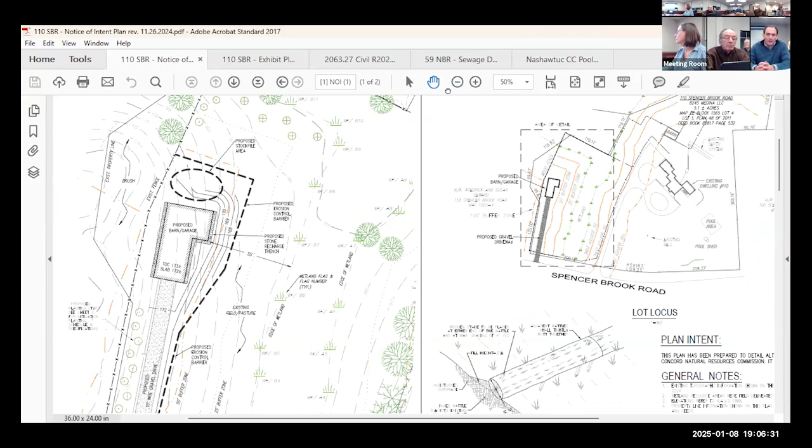The result of the project is an improvement to the vegetative buffer on the site. We're providing both screening vegetation and some naturalization of the existing field area. Sheet 2 has a listing of all those planting types and sizes. I see it coming up here.

Some of the neighbors have expressed concern about screening, so plantings have been specifically put along that area to provide screening for the neighbors' benefit as well as the applicants'.

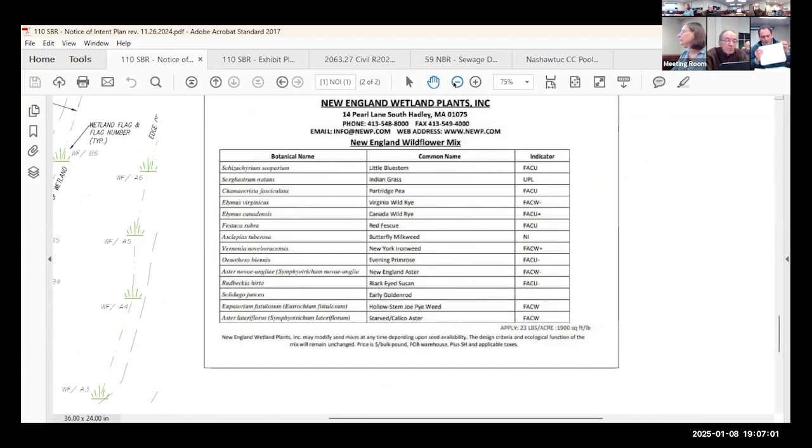The commission had also asked us to look into the feasibility of positioning the structure at the terminus of the existing driveway, so we prepared an exhibit plan that went through that. That's exactly that document there.

What we found was problematic is providing that access—they have to get into that area. We could position the building there, but it would result in a slightly reduced setback to the wetlands. We're proposing a 55-foot offset to the wetland with the preferred location; this alternative results in a 52-foot setback.

The relocation of the fencing, required to allow the animals to get around to the barn where they spend their evenings, would require removing the existing vegetative buffer and creating a bigger footprint of alterations. This proposed layout resulted in about 6,100 square feet of alterations, whereas our proposed layout on the notice of intent plan was limited to 5,700 square feet.

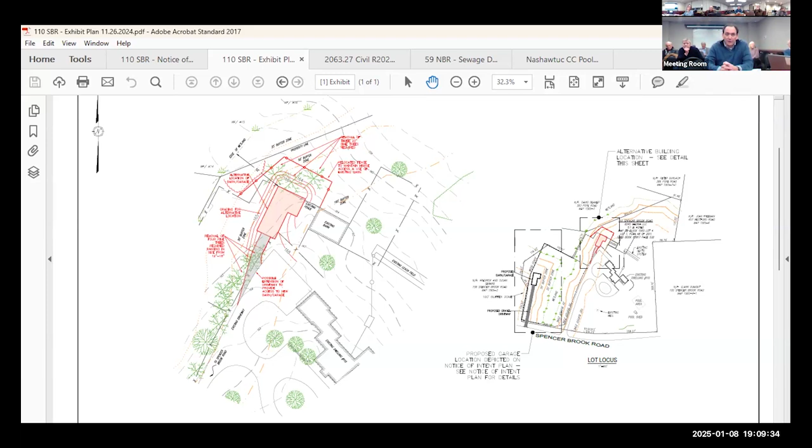Our proposed preferred location on the notice of intent plan does not require any tree removal, whereas this alternative would estimate about 4 trees removed. For those reasons, as well as the applicant's desire to keep using the existing barn in a reasonable manner, they much prefer what we presented on the notice of intent plan, and we'd ask the commission to consider that with the mitigation provided.

That is a summary of the changes in the documents that we brought forward to you, so I'd be happy to answer any questions that you have.

As you alluded to, there was a letter from the abutters that laid out many things. I saw that; we're taking that into consideration. One specific common concern is whether the mitigation will just be eaten by the horses and survive. I'm not sure if the plan you have here takes that into account with some larger shrubs in a different area, or if you're still proposing that a lot of the mitigation is the wildflower seed mix.

There's a substantial amount that is also trees—American hornbeam and some white pines mixed in as well, mostly along the perimeter areas.

I did receive correspondence from your office, and they were kind enough to let me know, and I spoke with the applicant. They are 100% willing to do mitigation on other areas of the property as well, removed from the pasture. The intent of this was to do it in proximity of the area being worked upon, but they'd have no objections. While outside the scope of the notice of intent, they intend to do landscaping throughout and would like to work with the commission on that going forward.

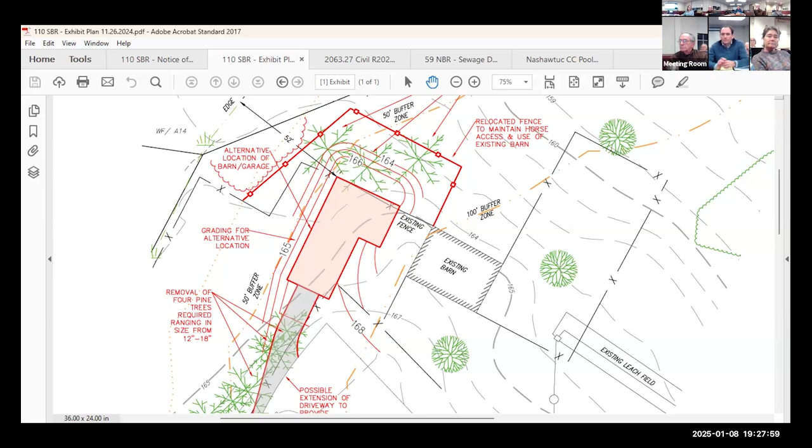Looking at the letter again, I understand that they'll be loading horses into the trailer, and if they're moving horses in a confined space, it has to be large enough for them to be comfortable doing it. So I'm not arguing that the barn should be smaller, but if it could be rearranged a little bit, it would improve things.

I had two questions sparked by looking at the letter again: is there going to be any electrical, water, or other utilities to the garage? The house is on a well—we actually spoke about that at the last meeting. We're not proposing to have any water in the location.

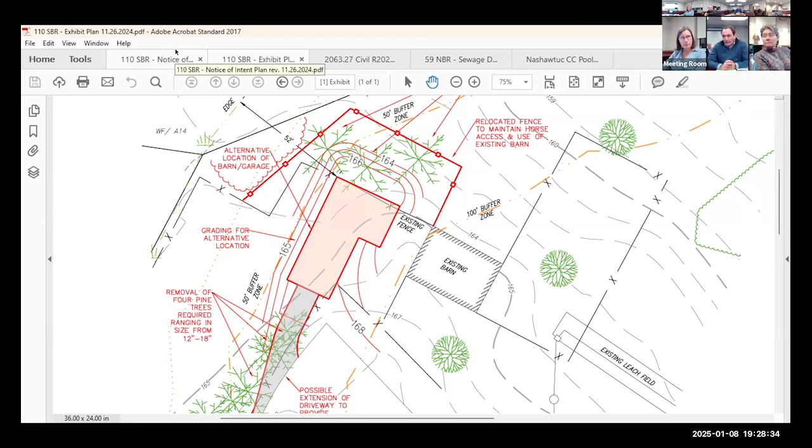There's a call out for the electric line on the far side away from the wetlands, along the gravel driveway in this location. We didn't detail the utilities on the exhibit plan—it's just for discussion purposes of this meeting, not really for a permanent basis. We do show the electric line, but not necessarily on the same service as the house—they would probably run a separate service off that.

So there'd be some way for the poles or trench or some way for electricity. The utility line is actually on this side of Spencer Brook Road, and this utility pole is just off there. The Concord Municipal Light would dictate how they would want that landed and connected.

It's up to you whether it's above ground or underground, but it needs to be shown on the plan too. Wherever you land, I was wondering if there's any impact on the buffer or anything. So we call it out right down there. The connection would be in the right of way.

Oh, I see. And it would go how, by trench or above ground to the barn? I'm assuming a trench, and that's the intent on the plan. Okay, and that doesn't go through the buffer area at all? No, it's in the entirety of the pasture, it's essentially in the buffer.

There's also a question about the depth of gravel for the horse trailer weight. Has that already been factored in? Yeah, a standard gravel driveway, 12 inches. So nothing different to what we've already seen on the plan? No, correct, and the driveway itself is essentially mirroring the existing grade there. You can see there's very minimal grading for that.

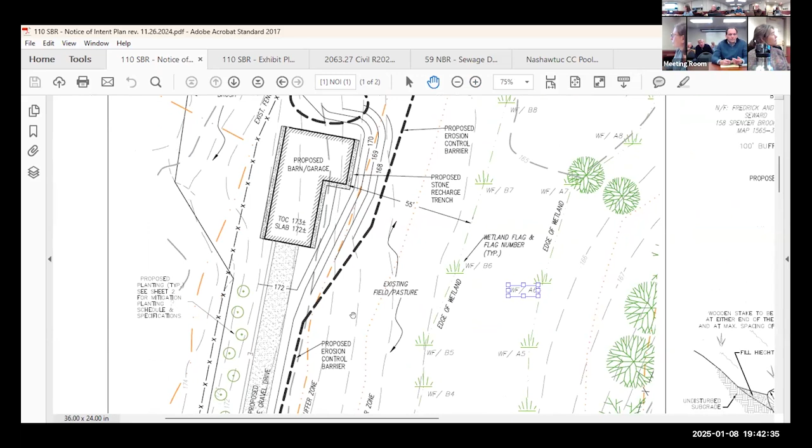Yeah, see, there's a 50-foot line from the corner, that L shape showing 50 feet. If you eyeball that, the erosion control barrier is 10 to 15 feet, exactly 12.5 feet if the measurements are right. But it's safely into the 25 to 50 foot zone.

So there's the 25-foot line, it's a dotted line, very faint, and it would be helpful if you made that more clear. But to be clear, there is work with the erosion control that goes beyond the 50-foot. The commission's policy is that structures need to be 50 feet away. We exceed that, and there's no work in the 25-foot buffer zone.

Correct. So just to be clear, the proposed erosion control barrier doesn't constitute work in the 25-foot zone, it's outside the 25, but it's within the 50, the 25 to 50 zone. And is that structure acceptable? Yes, that's okay.

I'm just going to pass this around. This is the entrance to the site. That'd be helpful about the trees, so you can keep that for the file if you want. You can see there's an existing gate there.

Which is the gate for the existing driveway or the new one? Oh no, this is in the proposed new location. Okay, but the gate is not, if I look at the plan, the gate is further over than the entrance to the new proposed driveway. That gate is not where the entrance is.

So the intent is to respect the commission's 50-foot no structure zone with the driveway, so it is shifted slightly up gradient, but we've located all the trees. Those are located by surveyors throughout the property. We've positioned everything to respect the trees and the 50-foot buffer zone in this case.

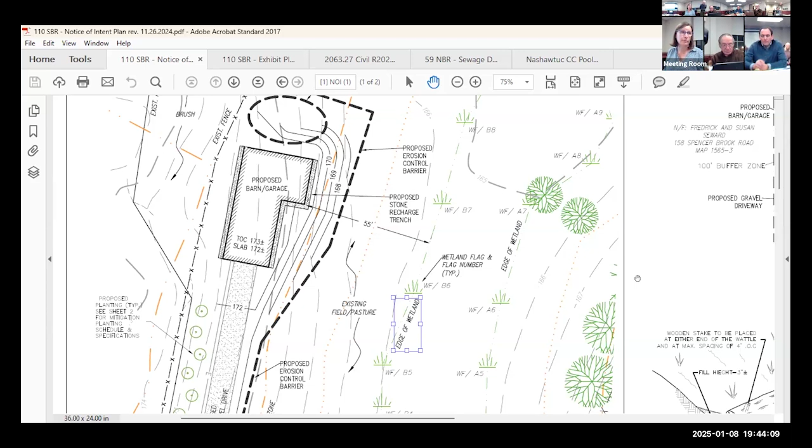Okay, well, thank you very much then. So we will be in touch about a visit, we'll do a visit, and if you can let me know so I can let the applicant know.

I think you should let the applicant know the commission will stop by to visit. There's three people on the commission, but I don't think you'll get a group attending at the same time. So let us know once the structures are staked and marked, and just let them know. I'd advise the commission to knock on the door when they go. I think it'll be hard to schedule since I'm leaving town Monday, so I need to know I can go onto the property no later than Sunday.

Well, when an applicant files, the commission has the right to go onto the property, but of course we want the applicant to be aware. I'm thinking in terms of staking and indicating where things are going to be. The sooner the better, if you can communicate to us when it would be set up so we could see it best. I'll check our schedule and let you know. The sooner that can be done, the better for me, just because I'm disappearing Monday morning.

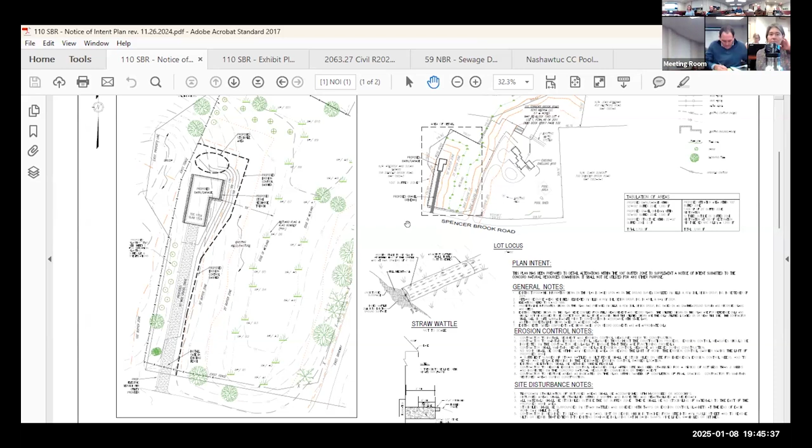Okay, thank you very much. I'll let the applicant know, and we'll continue to the 29th. Thank you, Karen, you'll let us know when they say. Okay, good. It'd be good if you had a map—maybe email us whatever the best plan is, or should we just pull it off the website? We'll email you something, or we can print out copies if that's easier. Thank you, Jean.

I'll just clarify for the applicant too that the site visit is for the commission. Abutters can't go on the property—it's at the applicant's discretion to allow that. Thank you very much. Witnesses from the public road, though, could watch if they chose to, I assume. No, just to be clear—abutters have the right to be on a public road at any moment in time.

Okay, thank you. It would be nice if you could look at the pasture when it's wet, because the lower area of the pasture is actually underwater some of the time. So we've reviewed the delineation on the side where the structure is proposed, and feel comfortable with where those flags show in terms of confirming the wetland boundary. You've probably seen those stakes—right, it's not a boundary, it's a condition of the wetland, particularly if the horses have been in there. You talk about planting things in this area, and it actually doesn't work at all. Okay, right, thank you, agreed.

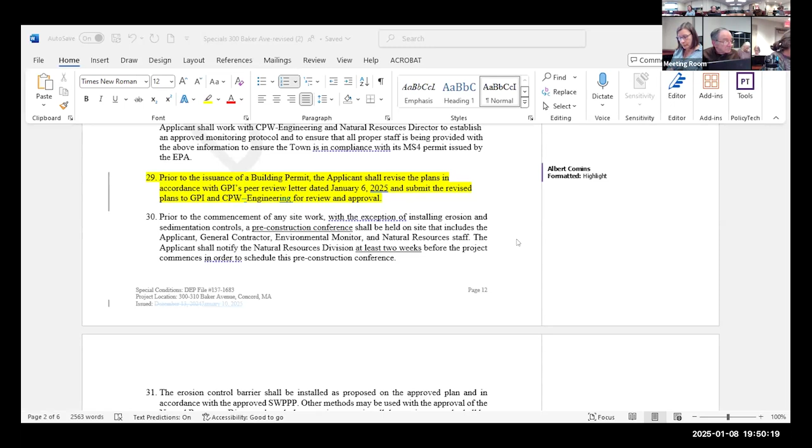So special condition 29 is new, and it syncs with what the planning board is recommending to ZBA. And then there's a new order. This is also just making sure that the drainage system prior to infilling is inspected.

Any changes may require an amendment to the order of conditions. My name's Kevin Hurley, I live at 25 Line Street. I'm a land planner and I represent the owner of the land and the applicant. Both of those additions would be fine with us.

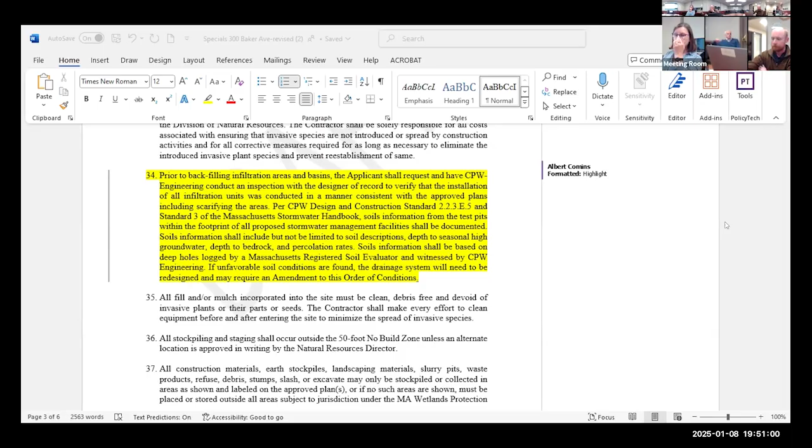Thank you. So if the commissioners have no comments, are there any other public comments on the application? Okay, well, we're ready to issue an order of conditions.

Is this the right one? I'm not sure. Would you see, Mark, how many? That's the old one I think. Yeah, 57, that's what I figured. Okay, 57 conditions, okay. I have it in front of me if you want me to move it. Go ahead. So I move that we close and issue an order of conditions for DEP file number 137-1683, the project at 300 and 310 Baker Avenue, with finding A, standard conditions 1 through 20, and special conditions 21 through 57.

Second. Thank you. And the vote, Nick? Aye. Gary? Aye. And I am an aye as well. Okay, thank you, Daniel. Alright, thank you. Okay, good luck with the ZBA. Thank you.

Okay, so moving on, my understanding is that 445 Fitchburg Turnpike has come off the agenda, correct? Okay, so we're now moving on. Danny is here. Hi, Danny. Hello. So we did not receive the final ANRAD plan. So tell us how you would like to proceed.

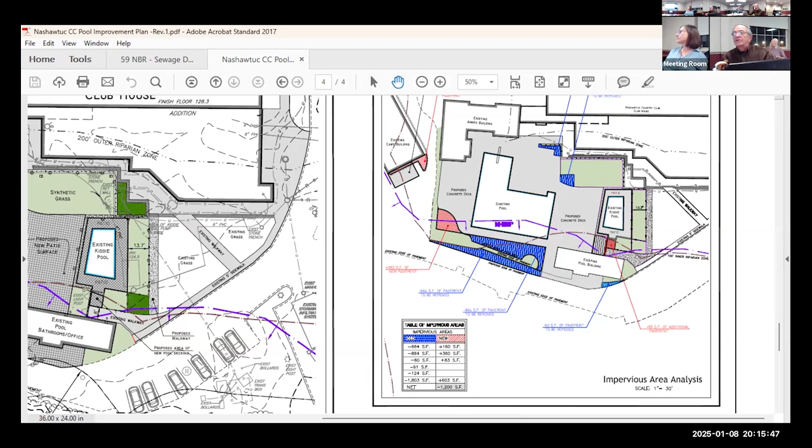So it's a difficult situation, I think. I can see that, but there's one other thing, you talk about it being permeable. Yes, it's permeable and water can flow straight through it, but the runoff is as rapid into the surrounding wetlands as it would be from concrete. And from the point of view of flood protection, artificial turf is actually classified as impermeable.

I want to wait till Delia gets back here. Okay, thank you.

So the answer is, this is out of my domain. I'm not an artificial turf expert at all. I know what PFAS is, I think I know what microplastics are, but I'll get you more information on that from the landscape architect. If I were to answer this, it would just be thoughts from my brain, and that doesn't really make sense.

Is there anything else that could be used, any alternatives that would meet the needs? I'll ask the club, obviously, if they have any, and I'll get back to you on that. Thank you very much.

And thank you for your comments, Jill. Okay, any other comments before we close this for this meeting? I have a comment, please.

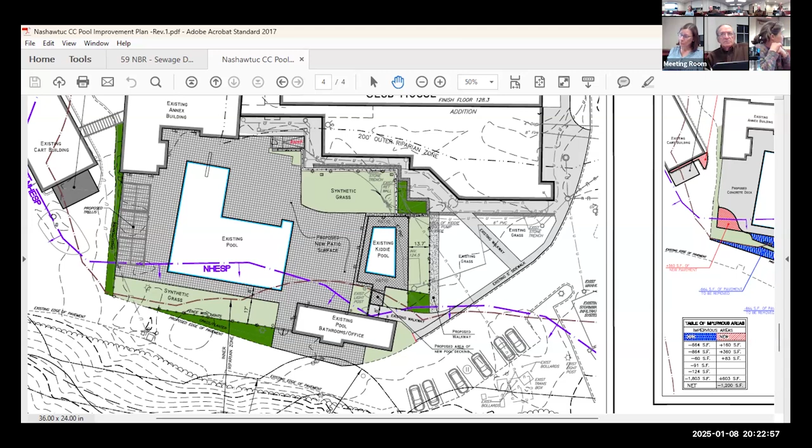I do have a question we haven't touched on. The proposed addition does include the removal of 3 cedars. No, we're moving the building. It's corrected on this plan. The previous plan had it going all the way to the edge.

Okay, so it's a revised, shifted-over plan, shifted into the middle. To be honest with you, it was how I designed it, and some landscape architect moved it. When I saw Bert's comment, I thought, well, who moved my building?

Okay, so tree protection. Yeah, we'll protect the trees. Good point. They're not in the greatest shape, but I understand. Per the bylaw. That's not a bylaw, but we have a detail we can share with you for tree protection on the plan. Okay, that'd be great. I've seen it where they put wood on it, not the cladding. Whatever it is, we'll put that around the drip line.

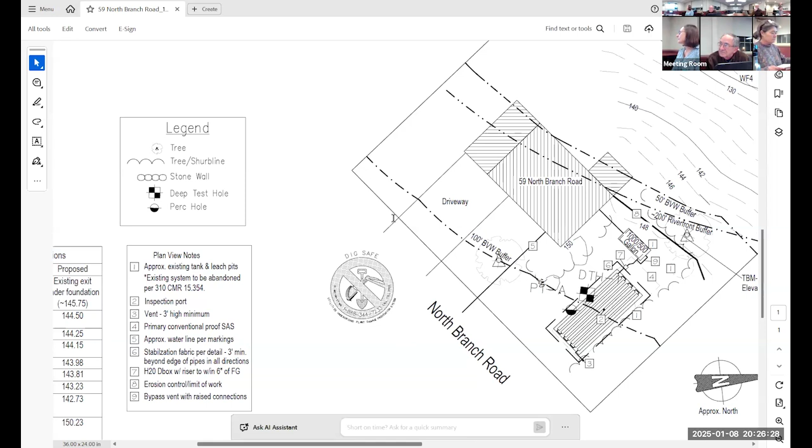So I am here for 59 North Branch Road, Stephen Shapiro. Delia, did you want me to share my screen? You can. Okay, thank you. Sharing is not turned on. Hold on. Go for it. You see this okay? Yes.

The replacement septic system is within the 100-foot buffer zone. We have a 200-foot riverfront buffer that goes approximately to the back end of the house. Within the 200-foot riverfront, there is no work going on. There is a vegetated wetland that comes well off of the stream, which I believe...

Matt, you're coming in and out a bit. You need to speak closer to your microphone.

So just very briefly, I think it's a straightforward project. If he could just be very brief, I think we can pick up. Oh, he's gone. He's still on. No, we can't hear you, Matt.

We tell him to try to call in. Can you hear me now? Yes, yes.

Okay, I'll be brief while I still have bandwidth. So what we have is a replacement septic system within the side yard of the single family home. It's partly within the buffer zone. The tank is being put essentially in the same place as the prior tank, so we're going to have a new tank in. The actual leach field has been tucked up farther away from the riverfront, outside the 50-foot buffer zone.

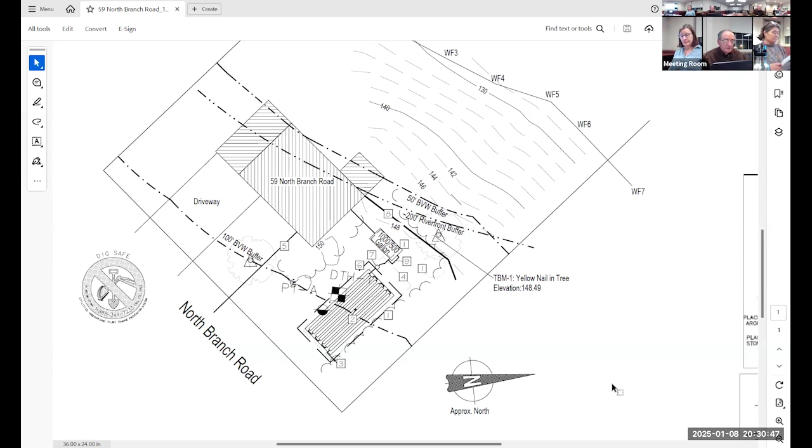So the certificates of compliance have come off the agenda, is that still correct? Yeah, so we had two certificates and I have not had a chance yet to go to either of those to confirm. So we will put those on the agenda for the 29th.

Thank you. And other business: extending the Warner's Pond Task Force timeline. There's a proposal for that? Yes, so the task force, the Warner's Pond Task Force, was expected to complete their work by December of last year, and they have not. They are meeting regularly and diligently. They still have a little bit of work left to do. They anticipate being done by the end of March, but I would suggest extending the time frame through June 1st, just to give them a little bit of buffer.

And that means essentially they have to have their recommendation to us, and then no more meetings after June 1st, right? Okay, and my understanding is they're not ready to go to town meeting for 2025, so it's going to be the following year anyway. If anything, yeah, if it goes to town meeting at all. Do we need a motion to do that?